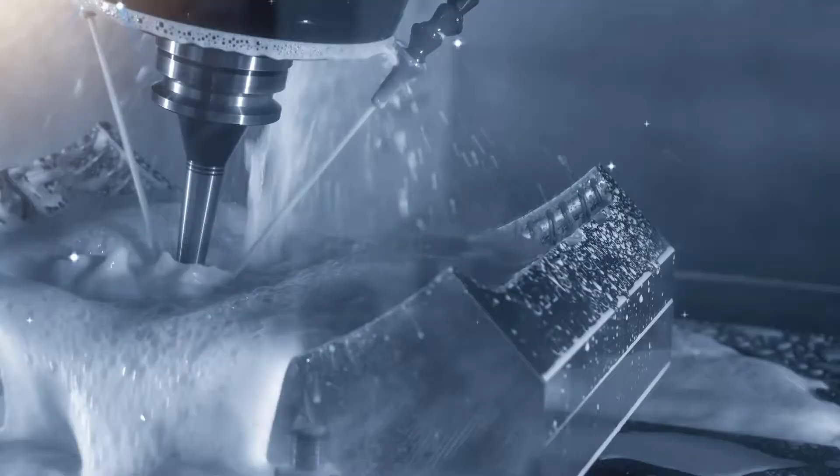In today's GibbsCAM Tech Tip, we're going to be looking at setting up tool blocks in your machine simulation to better assist you in getting your tools into position correctly, as we see in this simulation here with some of the tools just floating out in space as we have to put dimensions on that positioning.

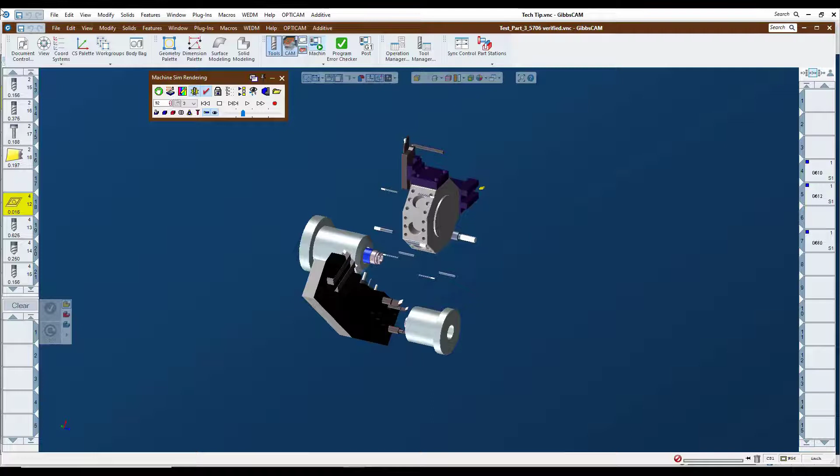So we're going to close this file out and we're going to get started on our tool block here. And this is going to be a quick overview as to what is necessary in order to accomplish this. So we have our tool block here sitting in our view. We look at the XY coordinate system and we make sure that the tool block is positioned accurately to the center line of the turret. So we have our dimensions here and we see that we are positioned here accurately.

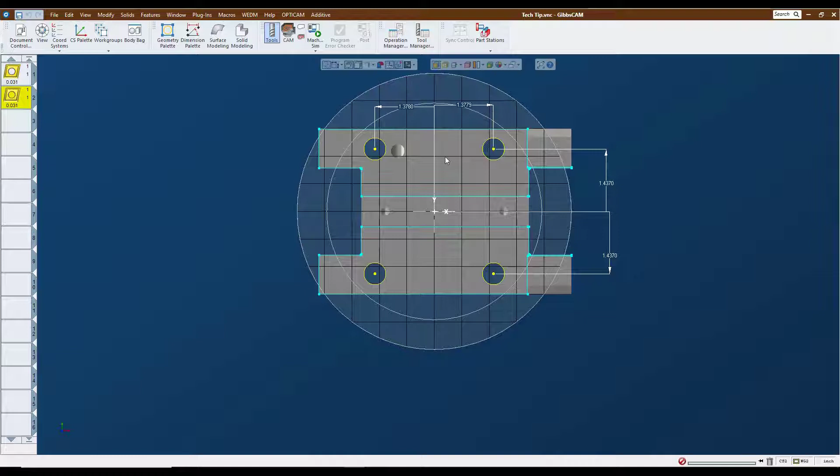We're also going to look at making sure that the height of the tool block is correct, which we see that this one is not quite right yet. We need this face in contact with our turret face. So we're going to make a small move in that using our absolute translate, and we're going to tune that block up into its position here. So now it's sitting on its surface there.

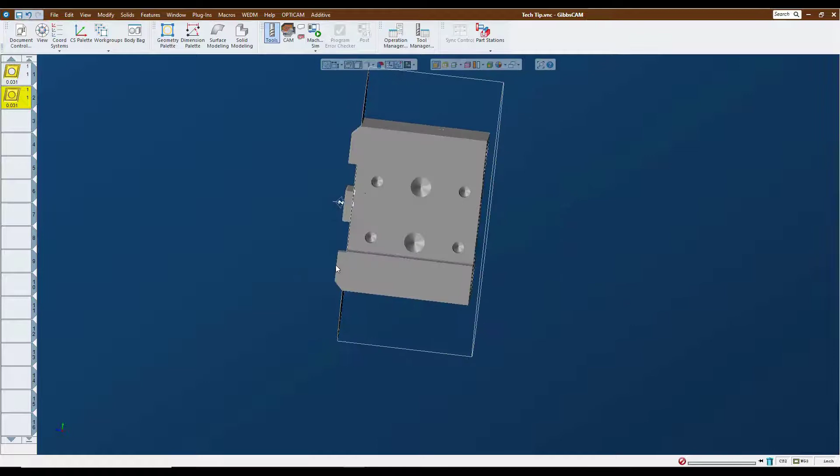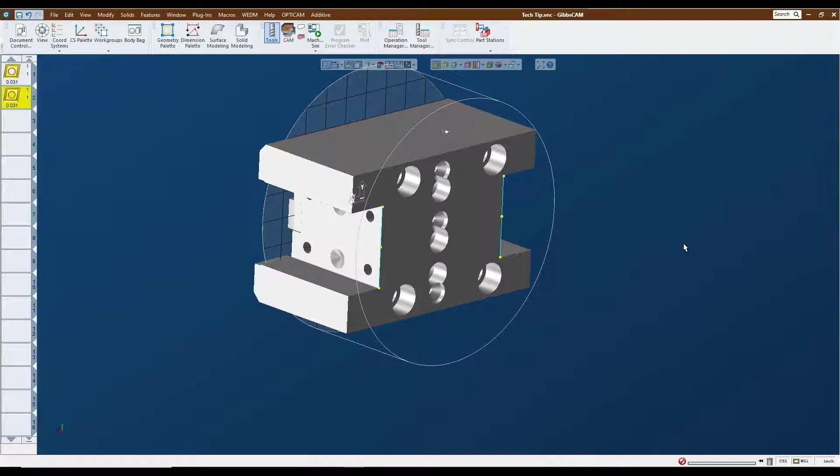So now on the other side here, we've got also some predetermined geometry. And in that, we're going to be utilizing the center line of these two lines here to position our attachment point coordinate systems. So I'm going to grab that line there, go to my geometry palette, and put a point in the center of that line. And then I'm going to do the same thing with this line over here. So those are going to be our coordinate systems for where our tools are going to be sitting for the left and the right hand side of this turret.

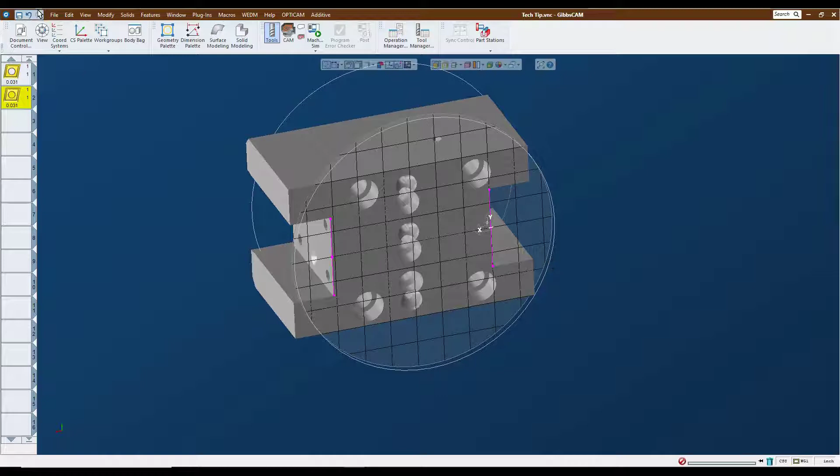I have a couple of coordinate systems set up here that I have already predetermined for those two positions. So here is our left hand turning tool facing the main spindle. Here is our right hand turning tool facing the subspindle. So now with all of that information ready to go here, we can go to our intermediate tool block library, and making sure that we're on the right machine here, we can start assigning our tool block. So we see our new tool block populated and ready to go.

So I'm going to click on my block here, and I'm going to go to the root and I'm going to add a simulation body. And we're going to call this my double turn block.

Okay. Apparently not typing so well today.

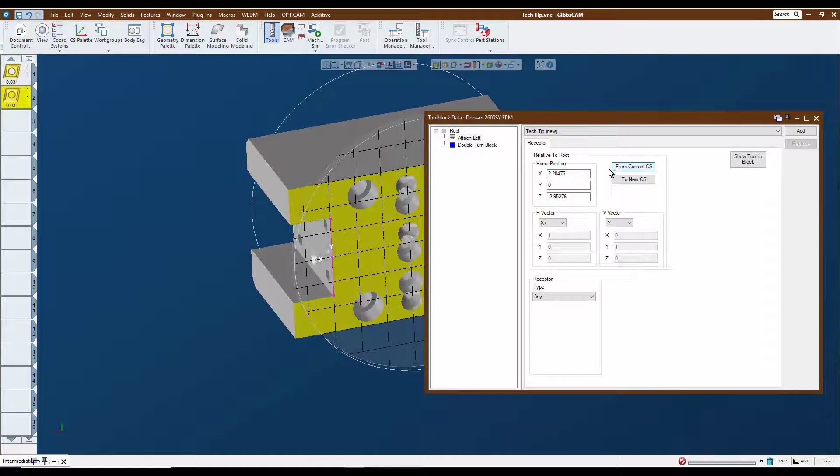Alright, so now the block is assigned, so now we need to assign the two connection points for it. So what we're going to do is we're going to activate the left-hand connection point, and we're going to click on the root again, and we're going to add a receptor, and we're going to call this attach left. And since that coordinate system is active, I just need to click on From Current CS, and it assigns our vectors and our X and Y coordinates and Z coordinates as to where that position is.

So then we need to add the other attachment point for the right hand. So we activate that coordinate system, go to the root again, and add another receptor, and we're going to call this one attach right. And again, we're going to click the From Current CS, and we're ready to go.

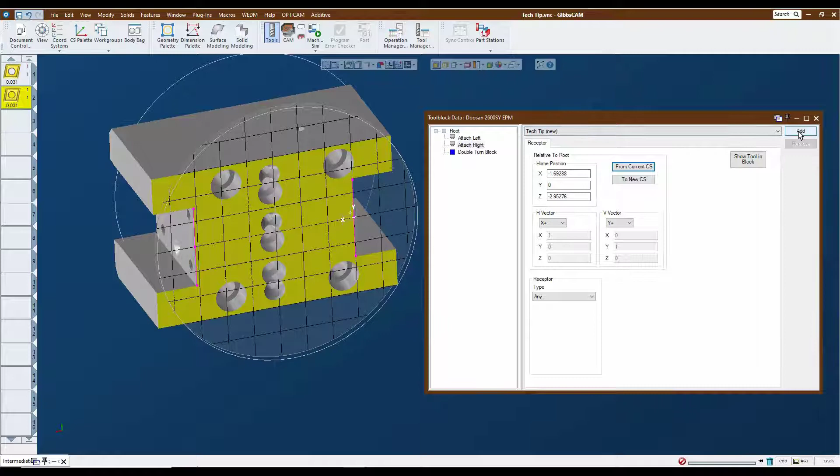So now we've got our vectors and everything correct there, so now we can just go ahead and click on the add, and what it's going to do is flash the screen and write this thing into the intermediate tooling library. And we're about ready to go here, and we're back to our file, and now we see a tool block that is ready to be used.

So now that we have our tool block set up, now we can load our tools into our tool block. And I'll take the first turning tool here that's on the left. We'll put that in the tool block. And here's my tool block right down here. And we'll go ahead and close that out and put that in the attach left position.

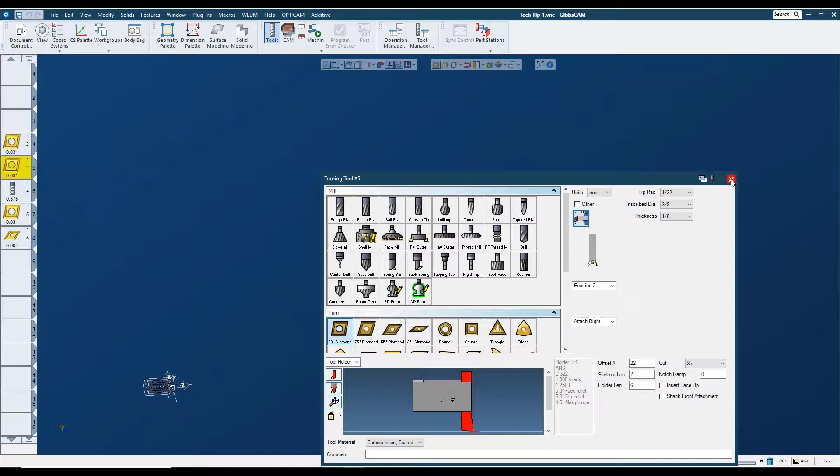And then we can go to our second turning tool, which is on the right hand side. And we'll put that in the attach right position. So with those tools in the tool block, we can go to our machine sim and we'll see them here in the simulation.